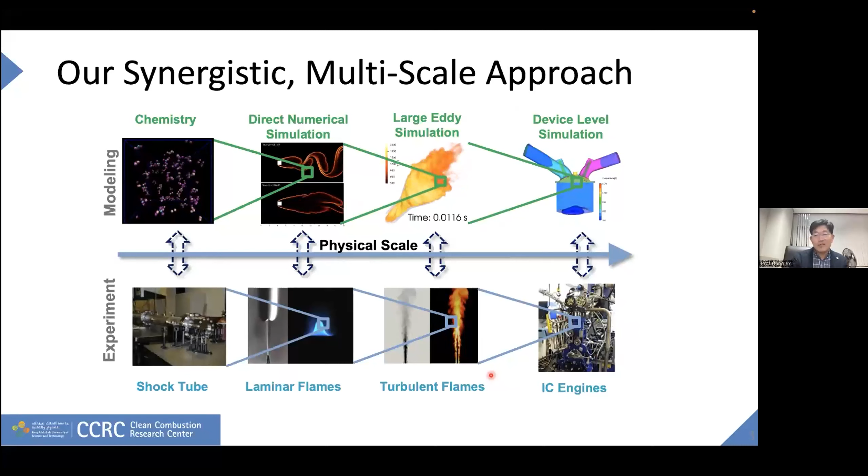So again, I'm unfortunately and fortunately the only CFD person in the center, and given the diverse research activities, I get to do all sorts of simulation activities, starting from DNS and LES and the engine work. So for DNS, I usually use my own research code, in-house code called KARFS. And for the engine simulation, we are heavily using Converge, the commercial code. And the device-level large eddy simulation is mainly conducted using the OpenFOAM research tool.

This is something I have started working on since I joined KAUST about 10 years ago. And this has become one of the integral parts of my research activities. So I'm going to talk about not necessarily all LES, there are some DNS components as well, but OpenFOAM-related simulation work will be presented today, okay?

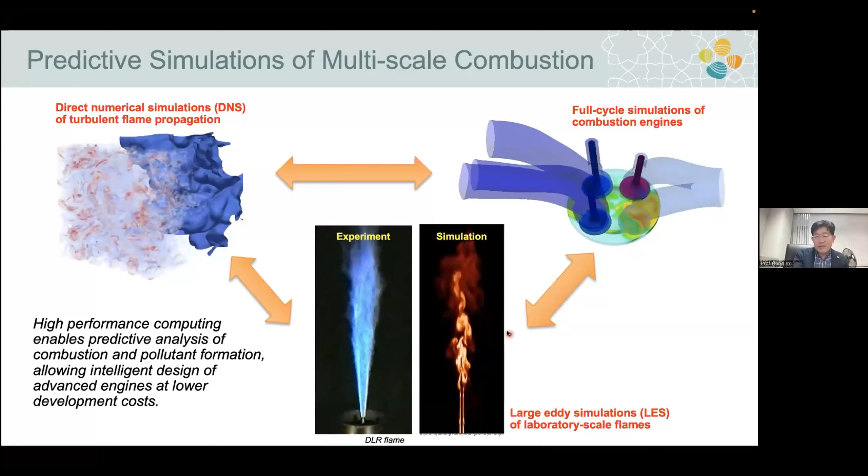So that's the idea. Well, just to set the tone, I'm sure this audience is easy to convince. I don't think I need to spend too much time on why we are working on combustion research, but just to set the current status, as an example, in the EU the legislation is shifting back, starting to recognize that battery and solar energy is not going to solve 100% of the problem. They are trying to acknowledge gas and nuclear to be included as green in their taxonomy.

Well, so my point is that I think the entire world is beginning to realize that such a rapid push for a green solution is probably not realistic. And we also clearly know the solution. So, especially speaking to the younger audience in this crowd today, who are kind of doubtful about their future, my personal opinion is that there is plenty of exciting work that is needed, especially to deliver the solution toward energy sustainability in the many decades to come.

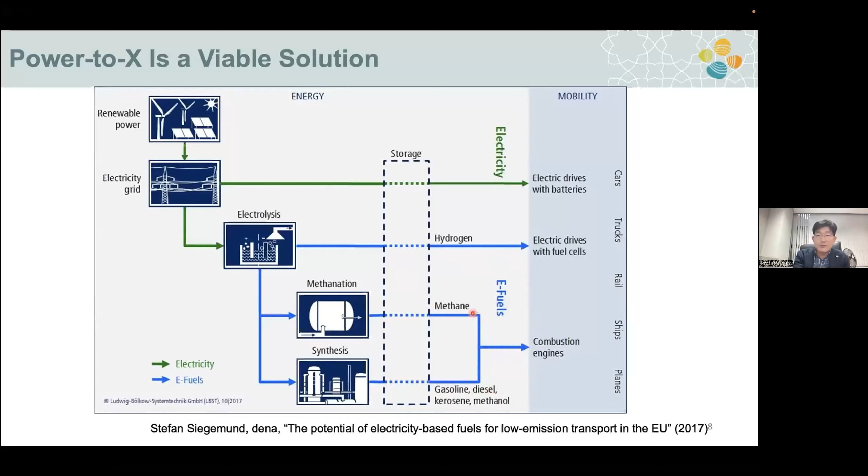So with that in mind, at the CCRC, the Combustion Center, our research focus is exactly that. We basically recognize there are some industrial sectors that are difficult to immediately decarbonize, such as heavy duty, marine, and power generation. And also there is a lot of industrial heat that cannot be easily generated without combustion. And storage, transportation, and utilization will become significant issues. These are going to be the wider variety of research activities we will be engaging in for the decades to come. In doing so, especially for me in computational applications, we will directly employ a lot of modern AI and machine learning techniques toward improved computational capabilities, as well as diagnostics and so on.

So these are some of the ongoing themes that we are trying to adapt. Compared to 10 years ago, we have changed our research direction. So some of the new research direction we are working on is, number one, definitely e-fuels. So especially hydrogen and ammonia are the two key fuels. I guess I don't have to emphasize this to this audience.

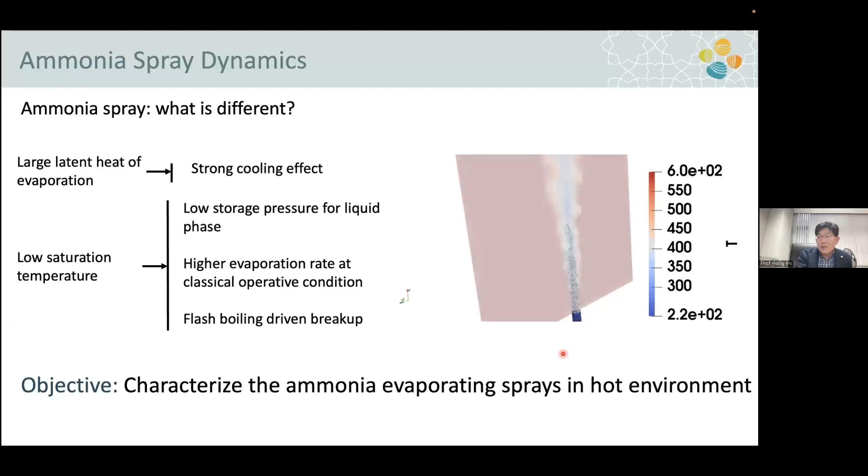So our main objective here is to run some basic direct simulation, Lagrangian Eulerian simulation, to understand the spray dispersion and evaporation pattern and how it is different for ammonia. That kind of simulation is done using OpenFOAM. As you know, sprayFoam is a very nice starting template we used, and this is the general configuration. I don't want to read all the gory details of it.

So basically, we have a periodic pipe attached here, so that has fully developed turbulence generated at the inlet, and along with it, we are injecting the liquid droplets, ammonia droplets, in a Lagrangian particle fashion. A large number of ammonia particles are injected at the droplet temperature of 220 K. And the main parametric study here is that we explore different ambient temperatures.

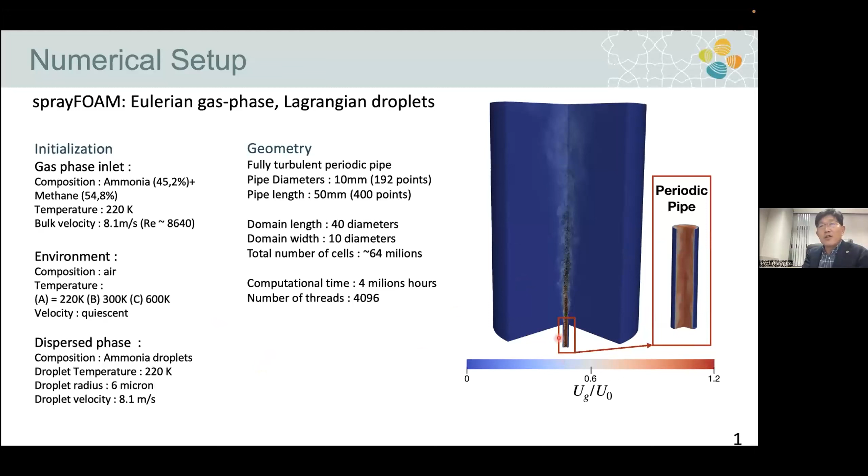One is the same temperature as the droplet, and the two other cases were heated to about room temperature and a sufficiently high temperature. And the gas velocity, the environmental velocity, is quiescent, although there is a turbulent inflow coming in to carry the ammonia spray.

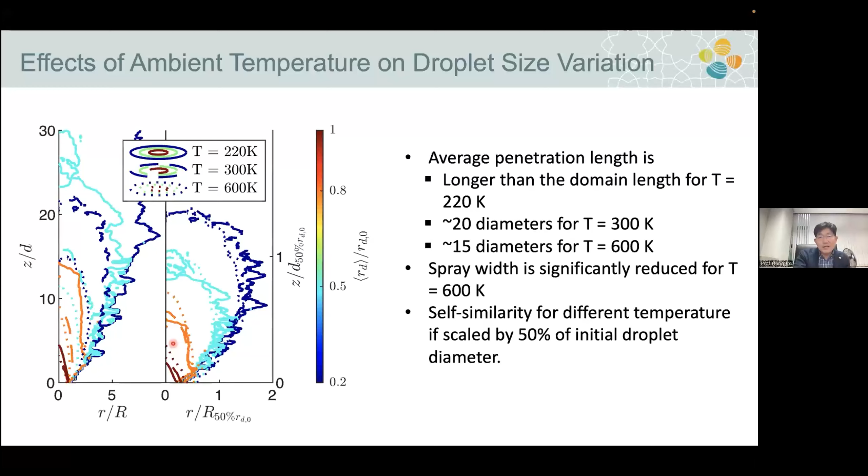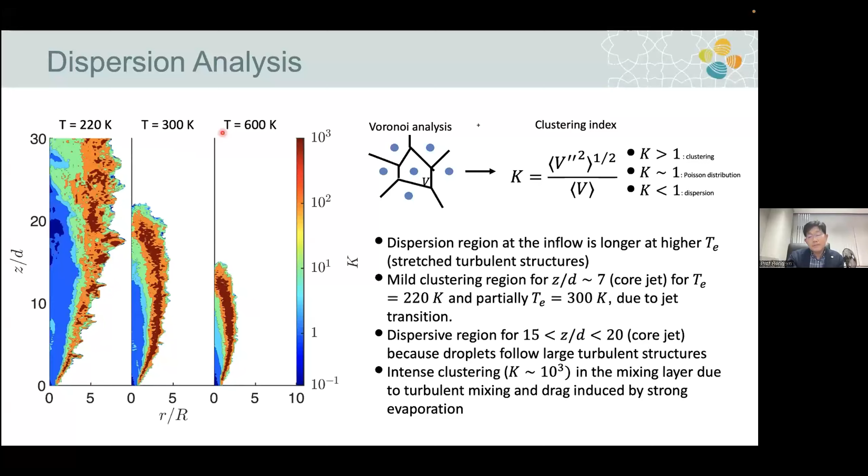Okay, so now moving on to the second topic, which is about turbulent combustion modeling. Now we are trying to deal with ammonia. This time it's gas phase turbulent combustion. My student Suleiman did most of the work here with the help of Francisco. We have an in-house experimental capability of studying ammonia turbulent jet flames. We're talking about non-premixed jet flames here.

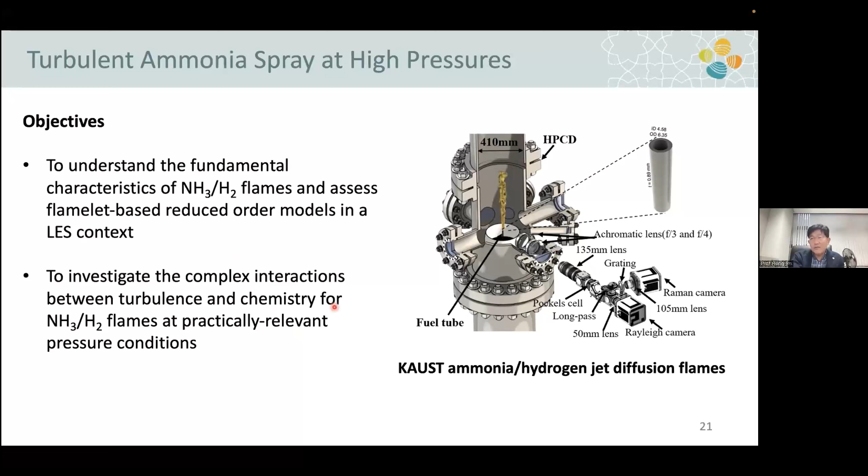Those are the basic study. We have just launched the study, and some of the preliminary results are coming out. These are excellent topics for the next TNF workshop. We are already working on it. Now, in order to predict that observed experimental configuration, we are also conducting large eddy simulation to match these results. In doing so, again, DNS is not feasible. We are trying to develop some combustion submodels.

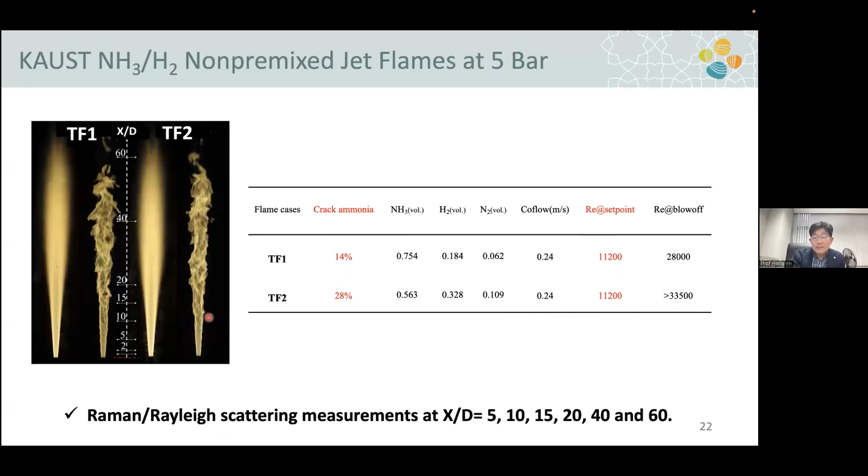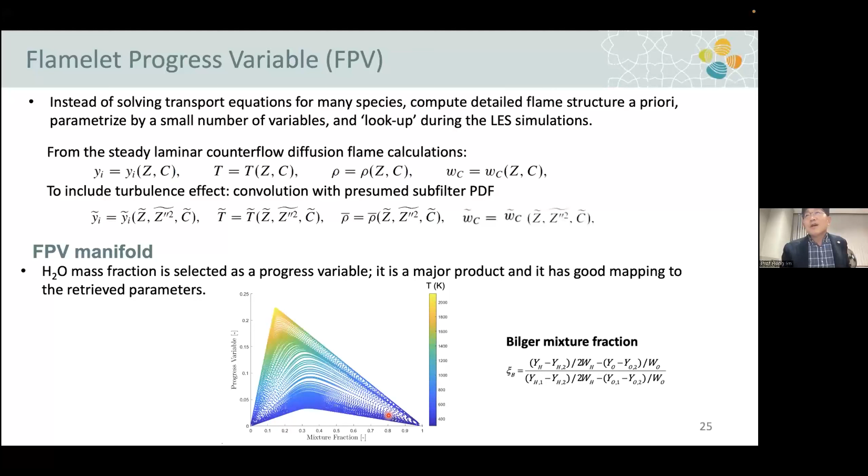To include the turbulence effect, we do the presumed subfilter PDF to integrate the cell-averaged species, temperature and density quantities. These are built in a similar way as many other people are doing. So this serves as a good benchmark submodel. But in terms of additional advanced model development, we took one extra step.

Recently, we started developing principal component analysis, PCA, which is an idea originated from Sutherland and Parente about a decade ago. The idea is that if you have large enough flame data, if you align them through the scatter plot, you can find a handful of important principal directions, which is not necessarily a single component, but some linear combination of those.

So instead of developing this PCA from complex turbulent flame simulations, which you can also do, we are borrowing machine learning ideas of generating a whole bunch of strained laminar counterflow flames at different strain conditions so that we can cover different phase space, the state vectors, and train them. By this training, we come up with the principal components, which may end up being a mixture fraction and progress variables in some cases. But these are agnostic, intuition-free generation of principal components.

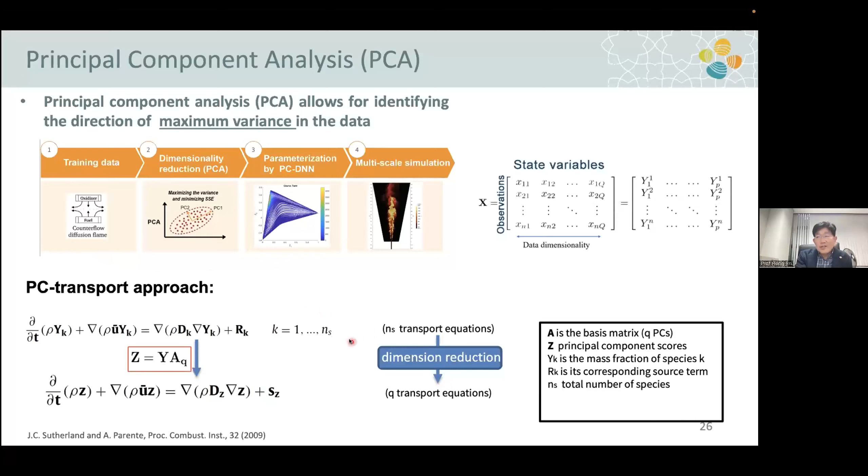But on top of that, as I said earlier, we are utilizing machine learning to speed things up. This so-called PCDNN, a deep neural network algorithm, is being used to tabulate all these PCA analyses instead of computing on the fly. And as our first step, regarding Lewis number effects, the unity Lewis number model was employed because generally accounting for non-unity Lewis number effects is complicated. There is not a unique single way to do it, and this is a subject of our future investigation.

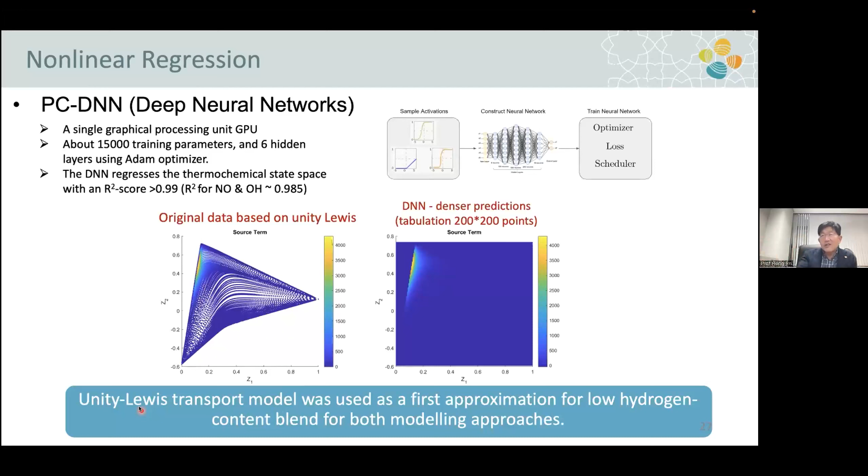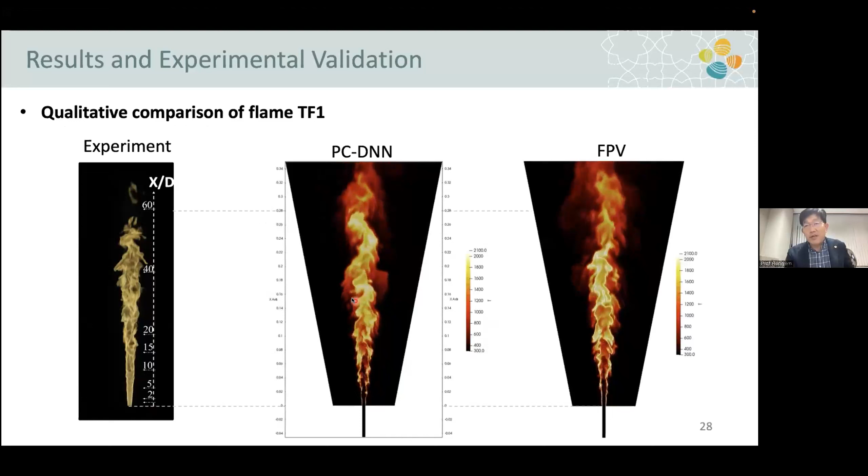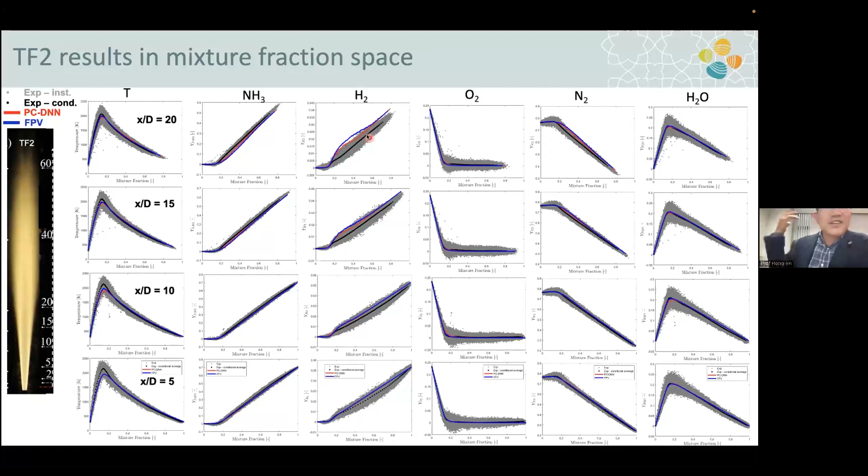I don't know if you hear the noise. Actually, it is raining as we speak, so the rain falling on the building is creating the background noise here.

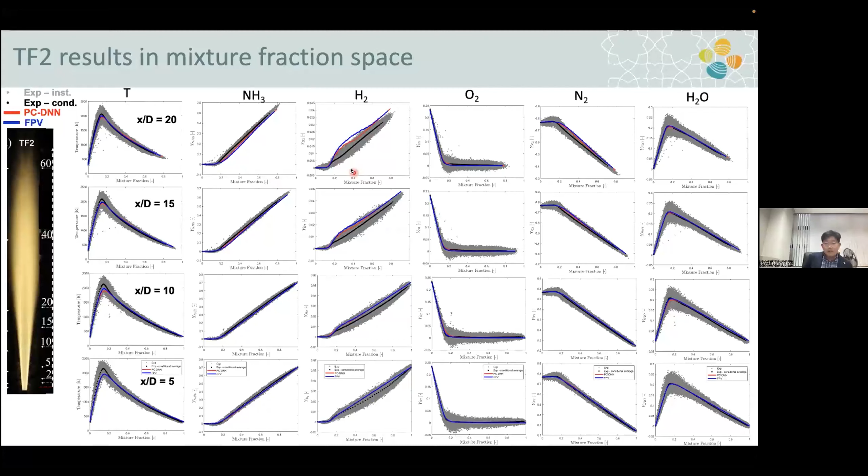All right. So we also predict TF1 and both different flames. For TF2, as you have a higher cracking ratio, as expected the hydrogen prediction error increases because you have a large amount of hydrogen. We also try to predict NOx, the NO mass fraction, for example. Again, they yield comparable accuracy between the two models. So at this point, this was concluded to be acceptable, with more work to be done.

Local extinction behavior in terms of data scatter is also reasonably predicted. I can't say for sure which model works better here, but both are able to produce some of these local extinction events, not as perfectly as the experimental data plot, but they're pretty good.

So those are the kind of work in progress. We are trying to develop the full-blown PCDNN based, which is actually a very powerful tool when the chemical behavior becomes highly complex.

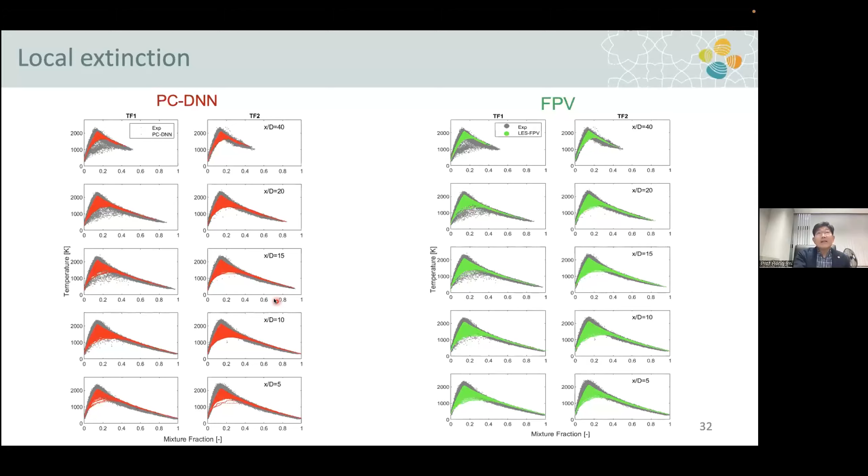Okay, I think I left about 13 to 15 minutes of the time. So I'm gonna switch gears, and the next topic of my OpenFOAM application is about spray simulation. This is non-reacting, but yet highly complicated physically and computationally intensive simulation. My student Alberto Ceschin has worked on the spray part, and Paolo Guida, who recently graduated, worked on the droplet explosion problem.

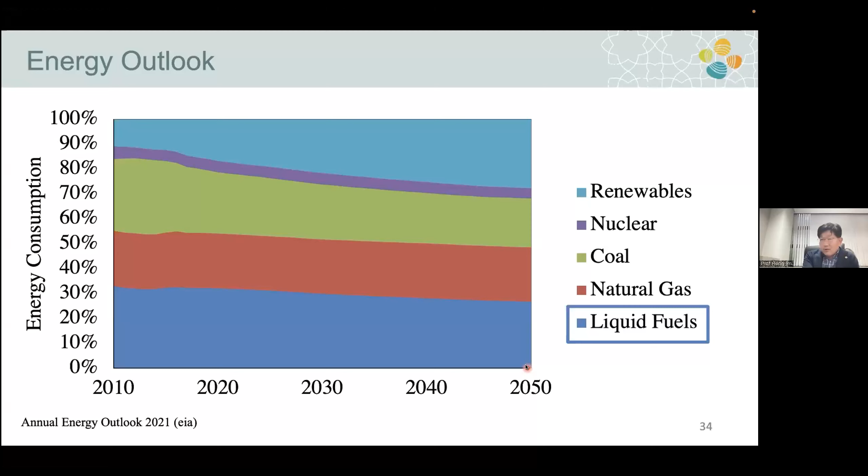Well, so another kind of background on the intro material. I guess the world is recognizing that liquid fuel will remain important even far into the future. So we still need to work on some kind of liquid fuel. It can be either hydrocarbon, fossil fuel based, or e-fuel based. But in the engine community, more recently, people are looking into the oxymethylene ether called OME, with different numbers 3 to 5. Those are considered very promising engine fuels in favor of the good NOx and soot characteristics. They can be fairly easily produced from other biofuels and so on. So these are considered another promising diesel substitute for the time being.

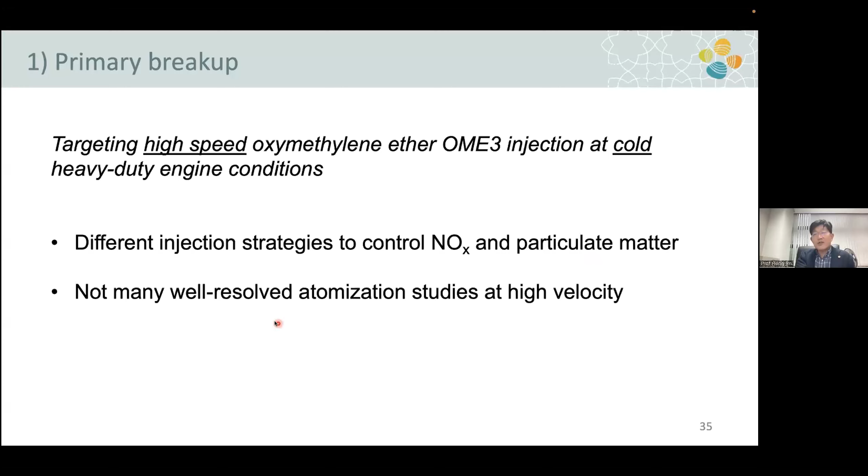So there is a growing interest in the engine community, such as the Engine Combustion Network. People are doing some experiments for spray characterization of this OME3. So we conducted some high fidelity simulation. What is challenging is the initial primary breakup behavior, in order to characterize the different injection strategies and how the injection strategies affect the subsequent soot and NOx prediction. The initial primary breakup phenomena is extremely multi-scale, a large spectrum of scales, and it is very, very difficult to reproduce.

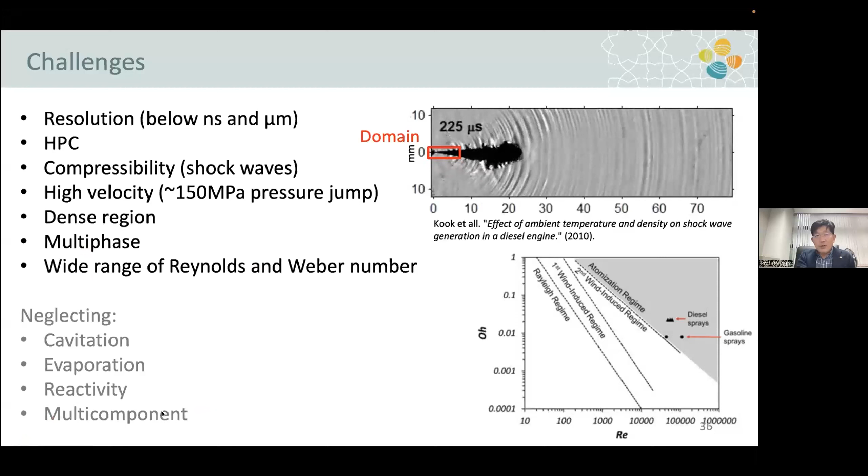And experimentally, it is highly challenging because of the sheer dynamic range of the physical scale associated with the presence of the shock wave, compressibility effect, extremely high velocity of the jet, the dense regions and multiphase; it's such a nightmare. So it is experimentally very difficult to measure, although there is some limited amount of data available. And so we are trying to do the first principle simulation of that. In the initial simulation, we neglect the cavitation behavior, evaporation, reactivity and multi-component. All those aspects are simplified. Still, it's a very complex problem.

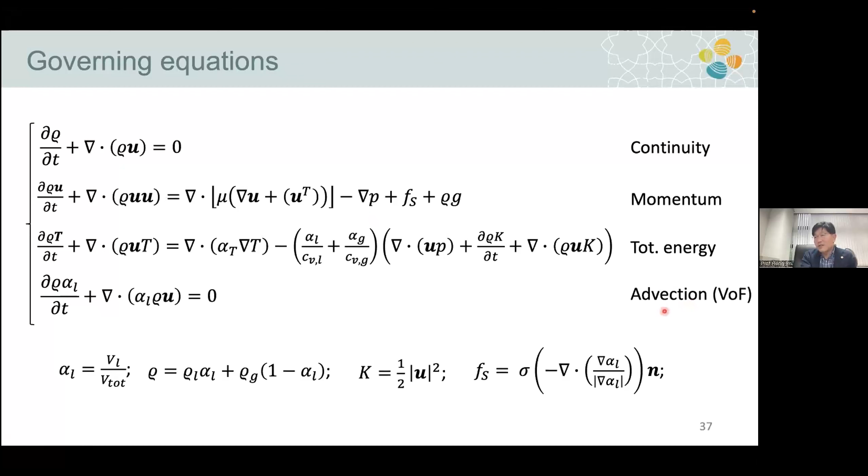So it is a single-fluid model with the two phases represented by the volume fraction of the liquid, alpha L, and alpha G is 1 minus that. We are solving all the continuity, momentum, and energy equations. And then advection of the volume fraction is done through the VOF approach. This VOF is already a built-in module for OpenFOAM. One of our key breakthroughs in our endeavor into this interface phenomena was the piecewise linear interface calculation based reconstructed distance function. PLIC RDF is the acronym.

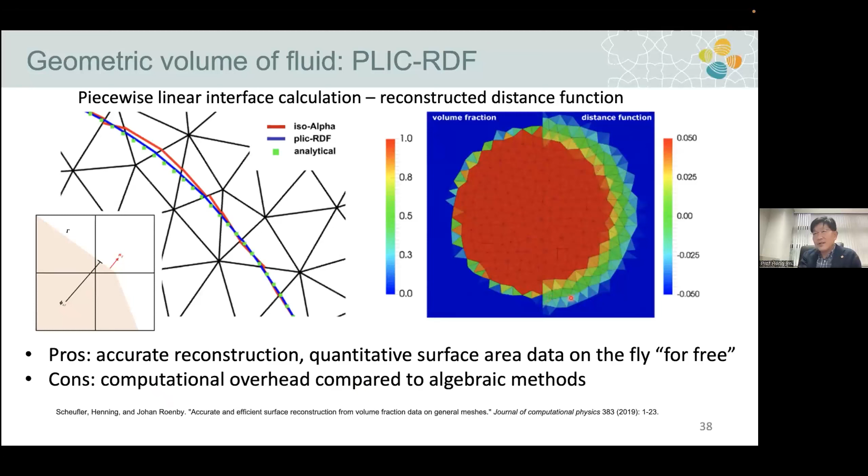And the VOF simulation has been conducted, combined with AMR; this animation clearly gives us an idea of how that works. Again, we didn't invent it. It was also implemented in some of the OpenFOAM toolkits. So once again, demonstrating the advantage of utilizing OpenFOAM. There are many tools already out there. We just need to borrow and add some more functionalities.

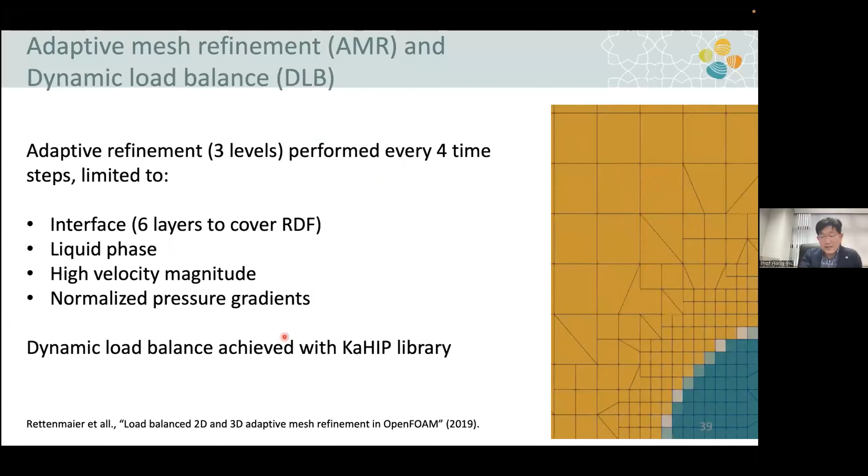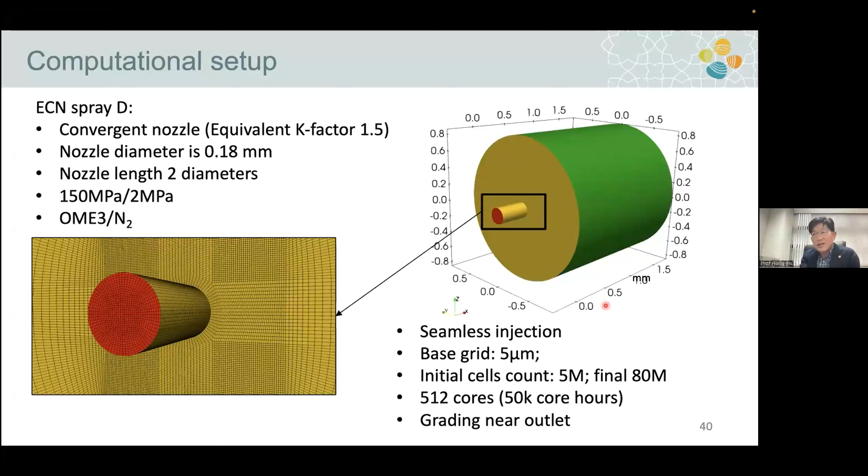So this is the nozzle geometry, a slightly convergent nozzle. The standard ECN Spray D with OME3 and nitrogen surroundings is the main study here. We have a very fine grid, with grid size about 1 to 2 microns, to capture some of the smallest droplets that can be produced out of this jet. The breakup has been captured.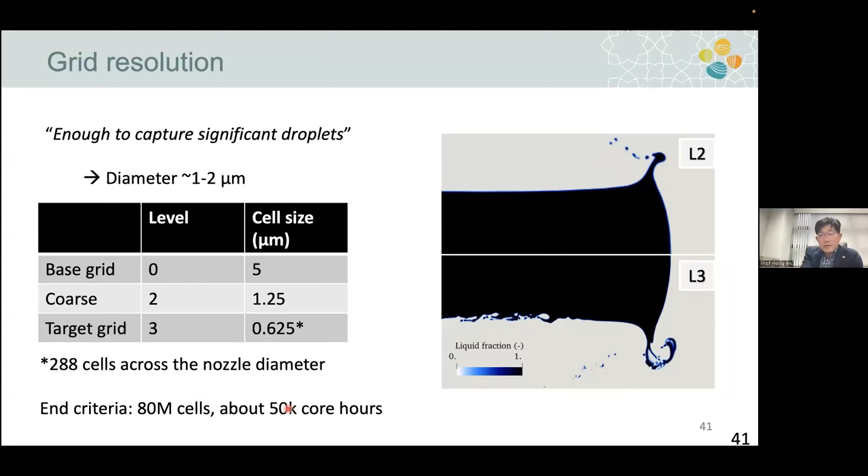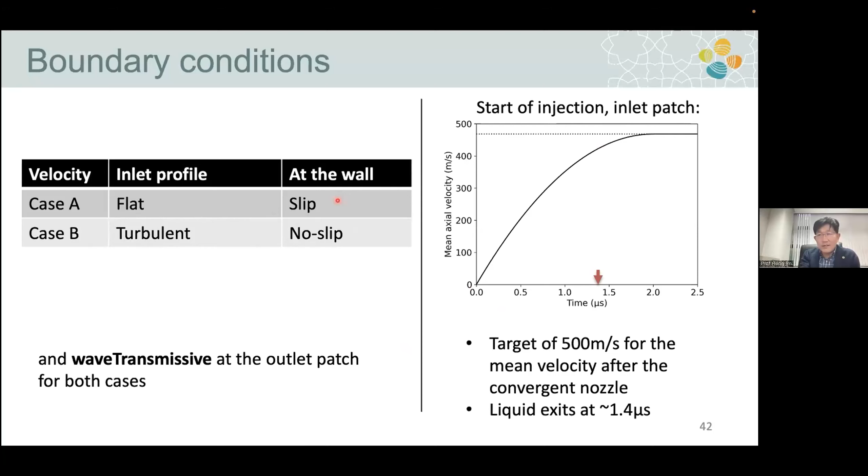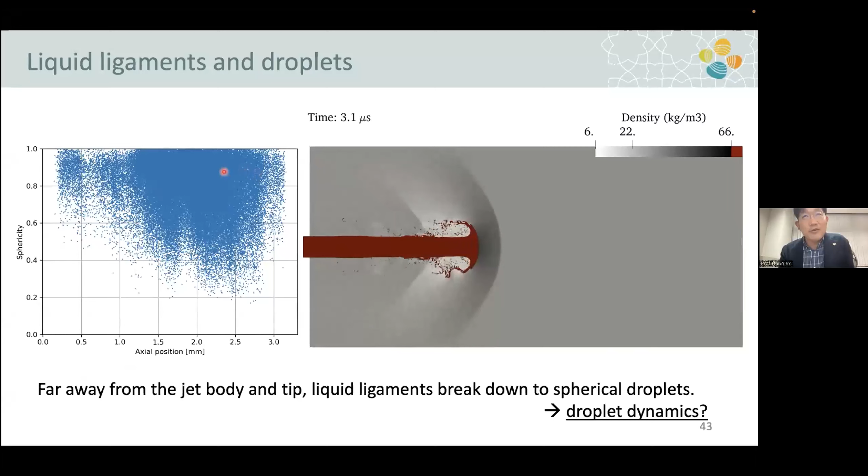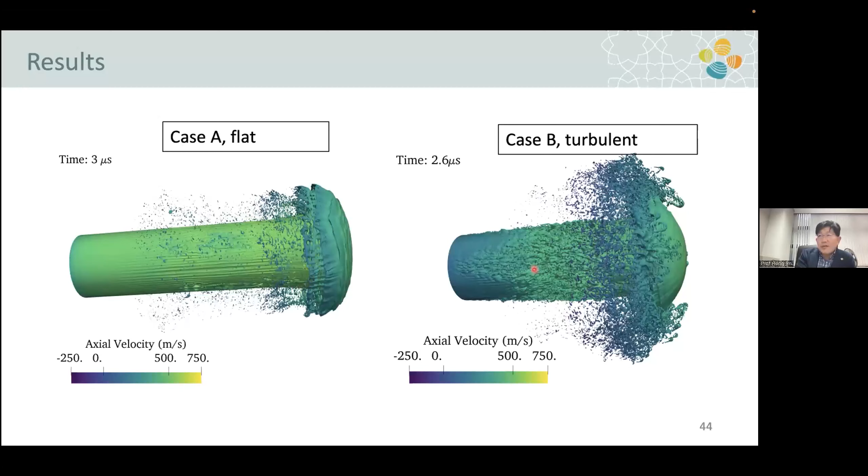So these are the snapshot image comparisons between the flat inlet versus turbulent inlet. Obviously, the turbulent inlet tends to break up faster, showing a lot of these Kelvin-Helmholtz type breakup on the side of the liquid column, which is more pronounced. And we were able to capture some of the physical behavior that was observed by experiment.

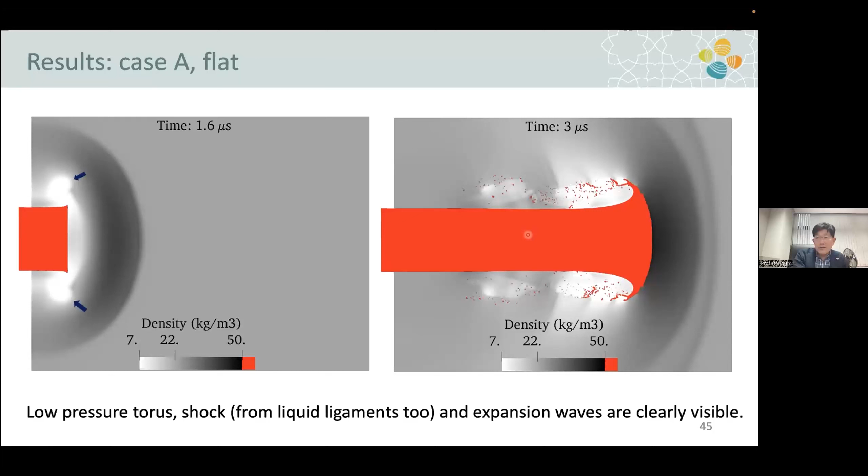These are the shock waves associated with the liquid column hitting onto the nitrogen environment. We are forming the shock wave, and that actually contributes further to this breakup behavior. And those are clearly reproduced successfully by this high fidelity simulation. And again, I'm kind of repeating myself. Some of these are breakup patterns. These are some sketches of how they break up into small child droplets. And these are really captured by our simulation right here.

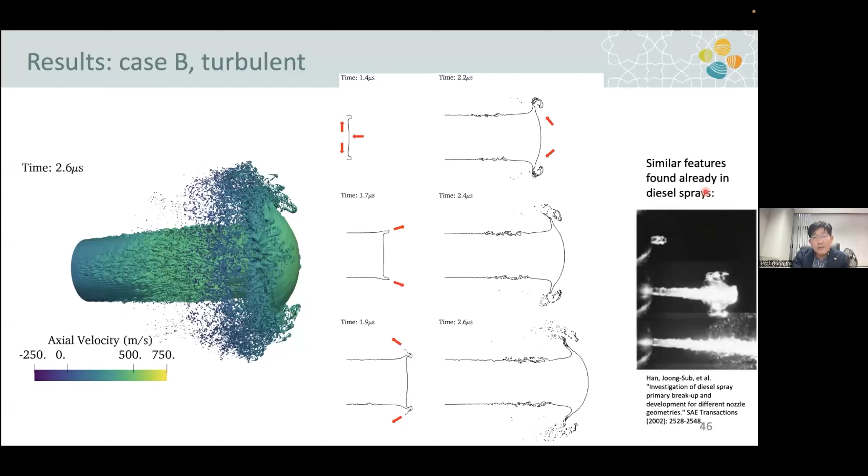And this actually confirms some of the similar features already found in the diesel spray experiment. So I think this was one of the rare high fidelity simulations, to our knowledge. This is one of the first success stories of DNS reproducing the jet breakup behavior, liquid breakup, in a fairly faithful way.

Okay, so the last topic, which was also kind of a cool demonstration, and I think this is again one of the first demonstrations of single droplet breakup, in particular associated with a bubble inside. These are obviously of practical interest, especially when you're dealing with heavy fuel. And in fact, at KAUST, we have ongoing activities in heavy fuel oil gasification. And this was one of the practical contexts.

So people also did experimental investigations of suspended droplets, how they break up when they heat them up, especially when there's a tiny bubble inside. These are highly complex phenomena, and experimentally it is really limited. A suspended droplet only allows a large droplet, so you can't really measure small droplet behavior. The frame rate and resolutions are limited. And if you want to measure the temperature, the thermocouple becomes intrusive, and so on. So there are many, many experimental limitations.

Nevertheless, some experimental measurements have been attempted. And to our knowledge, there is no direct quantitative comparison of the behavior by simulation. So we conducted that. Unlike the spray simulation I showed earlier, this time we actually did multi-component. So there's boiling, and there are two fields for energy and species. Individual multi-component species equations are actually solved. So those are the differences in this VOF application. So it is more computationally intensive, without reaction though at the moment.

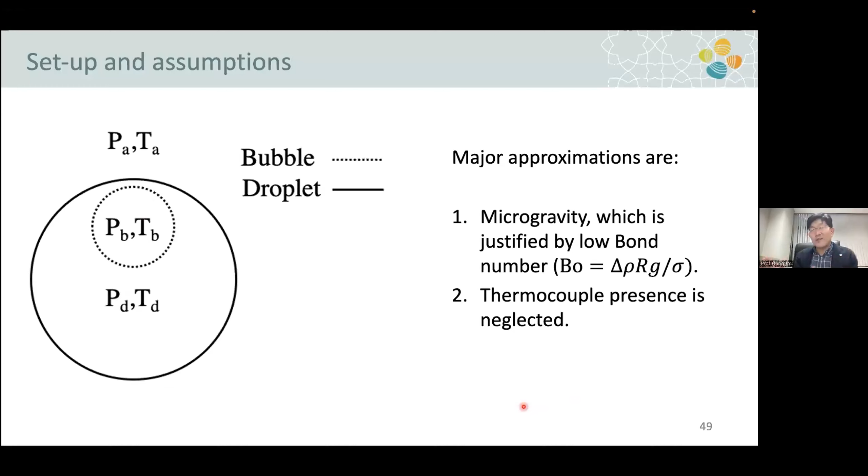So the setup is the following. We have a single spherical droplet within which we have a spherical bubble inserted off center. And the major approximation is microgravity. I think it's justifiable considering the size of the droplet is tiny. And the thermocouple is neglected. So obviously there is an expected gap between the experimental data and simulation.

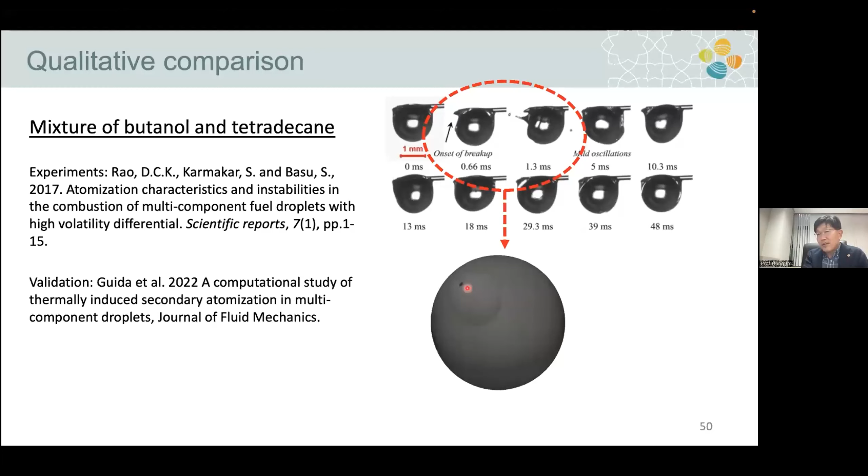So this was quite a triumph of our computational tool. Again, as I said, this RDF algorithm was critical in capturing this intricate surface phenomenon. And we further conducted quantitative, well, I should say qualitative at the moment, comparison. Quantitatively, there's still an error, but this was really the first demonstration that we were able to capture that the size of the ejected satellite droplet increases as a function of alpha r, which is the diameter ratio. And we were able to reproduce that faithfully. And likewise, the time at which surface area is maximum, again, we matched the experiment fairly closely by the numerics. So at least the qualitative trend is well captured.

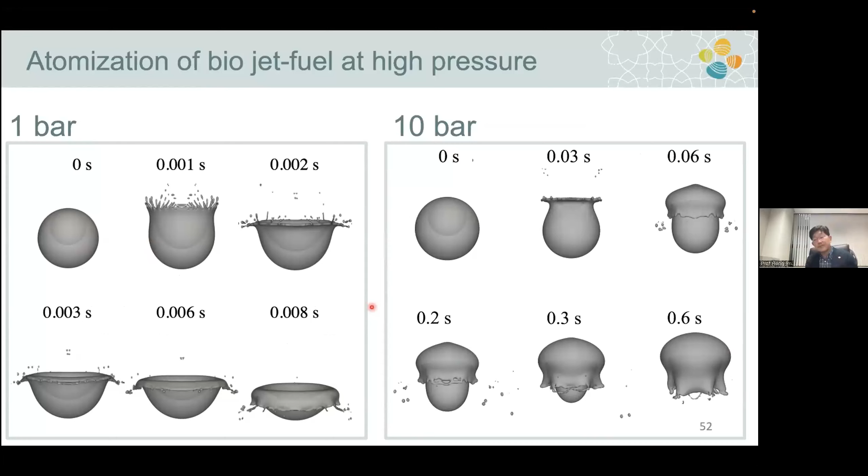This is another example, a more recent study of the biojet fuel breakup behavior. You can appreciate how the breakup pattern changes qualitatively, even with the same initial condition; depending on the surrounding pressure condition, the breakup changes significantly. And then again, we are comparing some of this observable behavior.

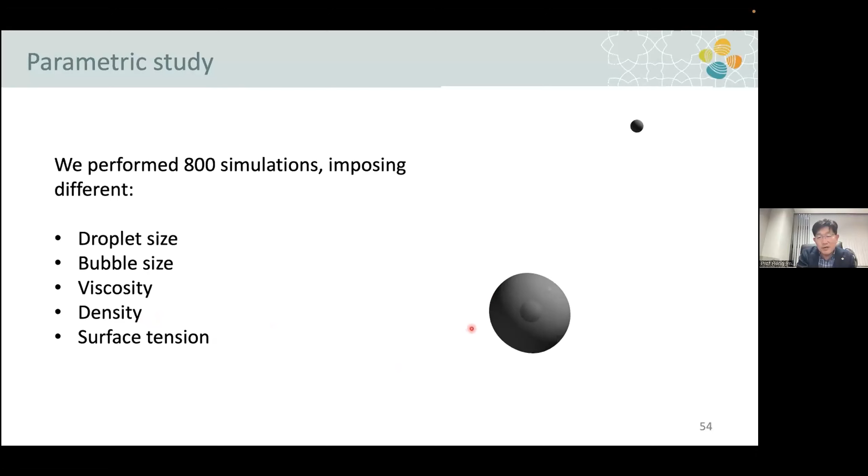So why does it matter? Why do we do this? As I said, we are developing this computational simulation module for HFO, the gasification tower. In doing so, there is an injection of liquid droplets, and they will break up, and they need to be gasified. This is such a complex phenomenon. We want to run hundreds of these simulations, depending on the droplet size and bubble size and viscosity, density, and so on. And we will build up and also introduce multiple bubbles.

This was really a cool reproduction of the physics, and you can see that these tiny bubbles actually move around the surface and get absorbed into the big droplet. So they don't really contribute much to the eventual child droplet formation.

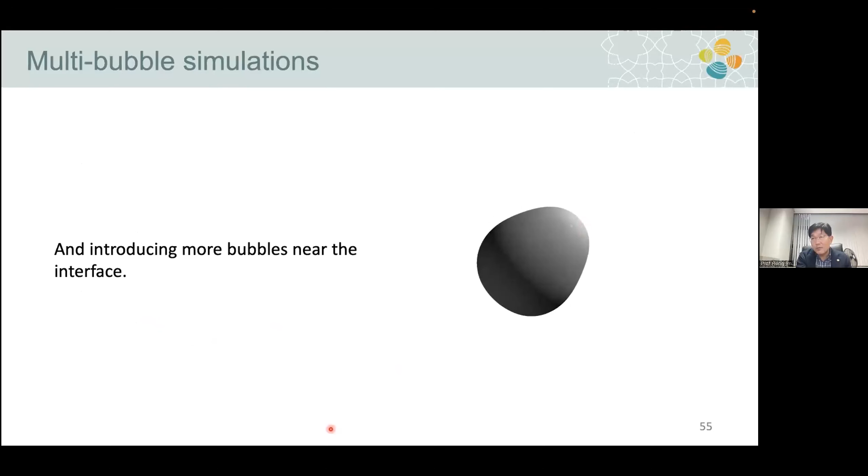So anyhow, much of this simulation data is used to compile our characteristic time and some of those global quantities that are useful in engineering-type simulations. So we are in fact utilizing this correlation data to simplify the whole droplet tower simulation. And this is actually current work in progress.

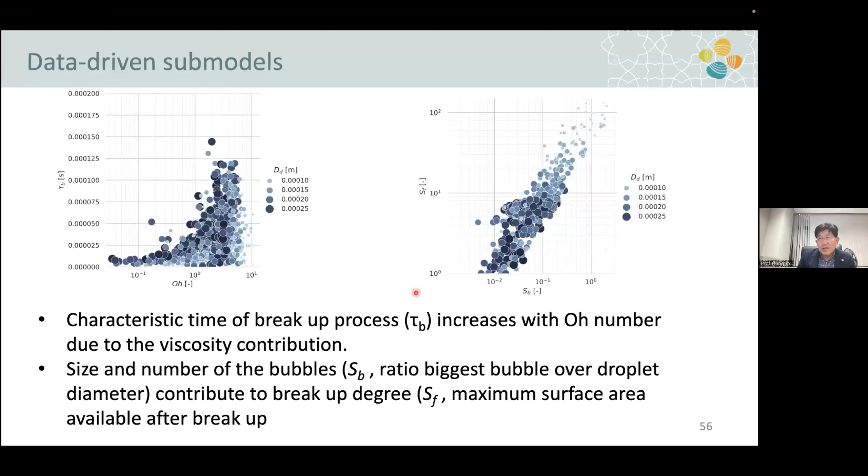So I think that's good timing. I don't leave too much time for questions, but anyway, that's a kind of show-off of small snapshots of our ongoing projects utilizing OpenFOAM. There are a few others, but my time is limited.

So I would like to summarize by concluding that OpenFOAM is a really good, versatile CFD code that gives us many functions without each research group having to invest in development, such as flow solver, unstructured mesh, adaptive AMR, Lagrangian model, reaction, combustion submodels, all inclusive. Each user needs to tweak some of the weak areas, and then we can immediately get the results.

So we are hoping that many of the audience here today have a common framework, a common platform of OpenFOAM. I think this is another benefit of working in the OpenFOAM community, to enable easy collaborative programs between different groups.

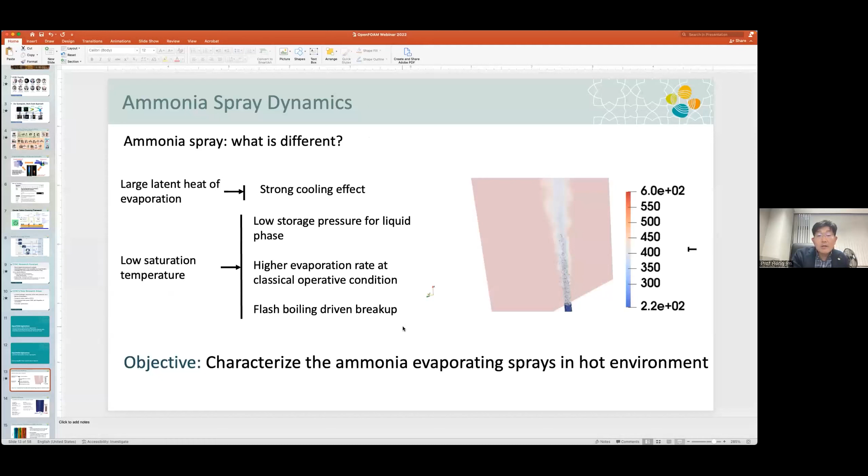Yeah. Well, so there was, about this first phase ammonia droplets. I don't have the exact number, I'm sorry, but I guess there are like several hundreds, maybe if not thousands. Those are seeded into, it's monodisperse for now. The droplet radius is 6 microns at the same velocity as the flow, and then we are just injecting at the nozzle.

Well, okay. This is still initially a fairly dispersed spray. So we are not really complicating the problem by allowing them to collide and merge. It is a single Lagrangian particle, and each of them are evaporating, but we want to know how they disperse, and this dispersion pattern is a key subject in this study. Okay.

In fact, that is related to one of my own questions, so I may just ask now. So I can see the diameter of the droplet is 12 micron. How does it compare to the mesh size near the inlet? Because it could be a problem when they become comparable. You mean the jet breakup part here? No, so you mean the ammonia spray?

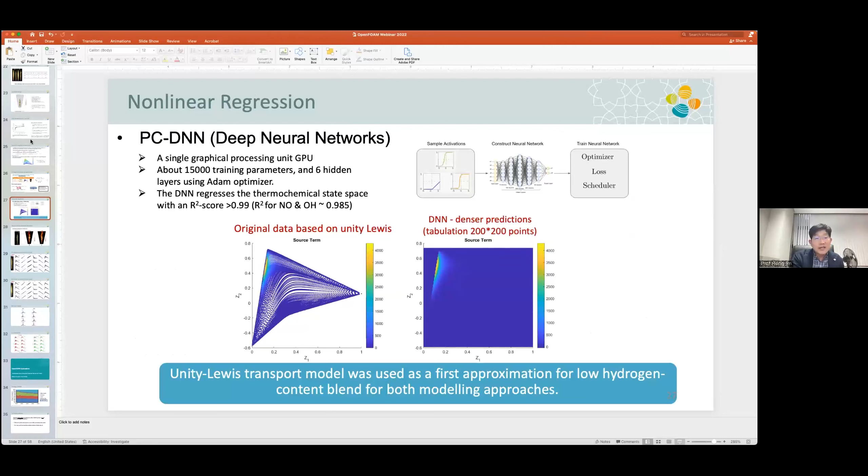Okay, thank you. So his last question is, for the LES case, what is the advantage of your machine learning method compared to the others? Well, machine learning is everywhere, as you know, and we are also using them. Machine learning can be added to any submodel. In fact, we are also working on a standard flamelet progress variable. Even tabulation can be done by machine learning. You can tabulate it and look it up, and those tabulation algorithms can also be enhanced, accelerated by machine learning.

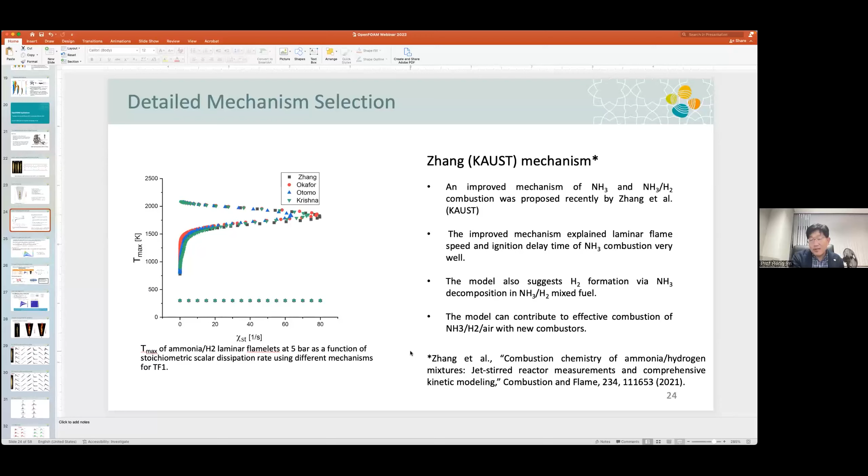So my simple answer is that machine learning is a separate tool, and tabulation relies on big data, a large number of data, curve fits, and so on, and those are the usual targets that can be easily accelerated by the use of ANN algorithms. Just to elaborate more, my new approach of this LES is based on PCA analysis. I guess the advantage there was clear. We are trying to reduce the number of transport equations being dealt with in the LES simulation.

Okay, thank you. We have some questions from Huang Wei. Do you want to ask yourself, or should I read them for you? Okay, I can ask myself. Sure. Yeah, thank you very much for your nice talk.

Professor Im, for the first application, what is the carrier gas for the ammonia droplets in the jet? What is what? What is the carrier gas, the composition? Well, sorry, I think it's just nitrogen. Oh, it is pure nitrogen, right? Well, there is no reaction whatsoever, and just the droplet evaporates. No, sorry, the composition is air. But it really doesn't matter. There is no reaction, and the density is all accounted for in a general way.

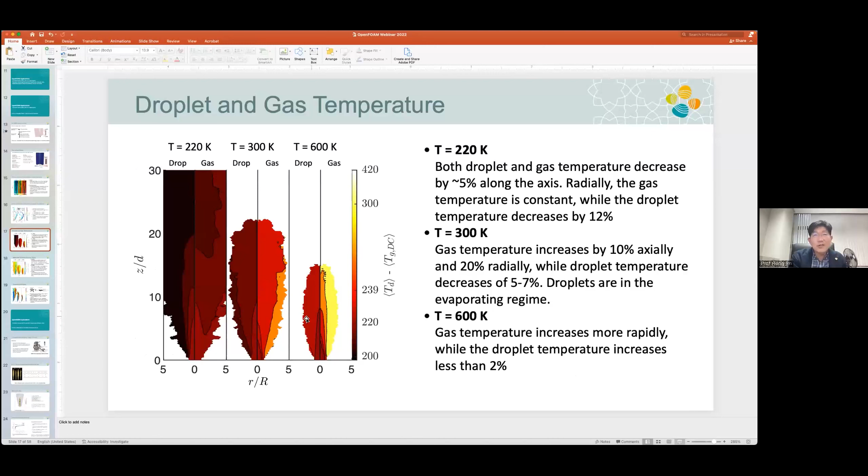This is mainly about a single Lagrangian droplet evaporating, losing its mass until it evaporates. And through that evaporation, there's a mass, momentum, energy exchange with the surrounding gases. So I apologize, maybe I made a mistake, but all those transport and thermodynamic properties are kept as they are. We're just dealing with the mass and heat exchange as shown right here, and this one, right? Okay.

So actually, there's a second question following the first one. How do the ammonia droplets affect the gaseous flame? Originally we have the methane flame, because the methane is from the jet, so it is a methane jet flame, right? Then we also inject the ammonia spray from the jet. You're talking about dual fuel, like ammonia added into the methane flame.

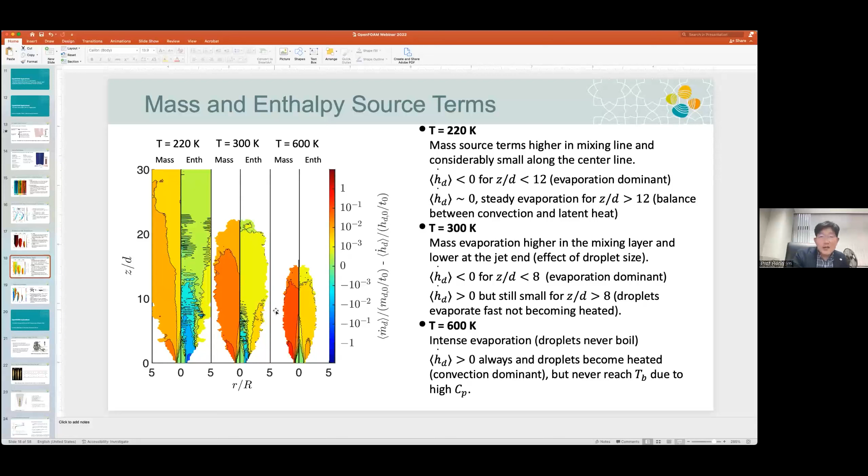Yeah. So that is a kind of scenario you may think about, having a methane flame surrounding the ammonia spray, for example. And ammonia will provide evaporative cooling to cool off the core region, and it will also be dispersed in such a manner. So this is exactly the context of our study. At the moment, we only represent the effects of the heated surroundings by just heated air, without considering the combustion. That's the future work to be done. Okay, no problem. Thank you.

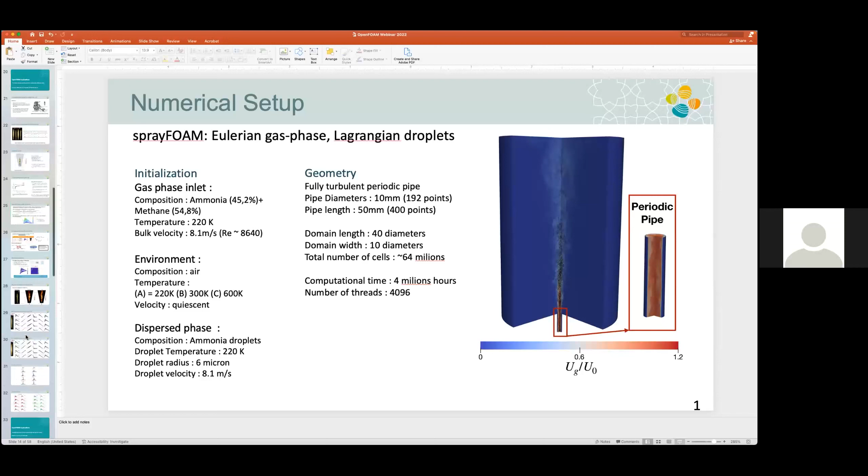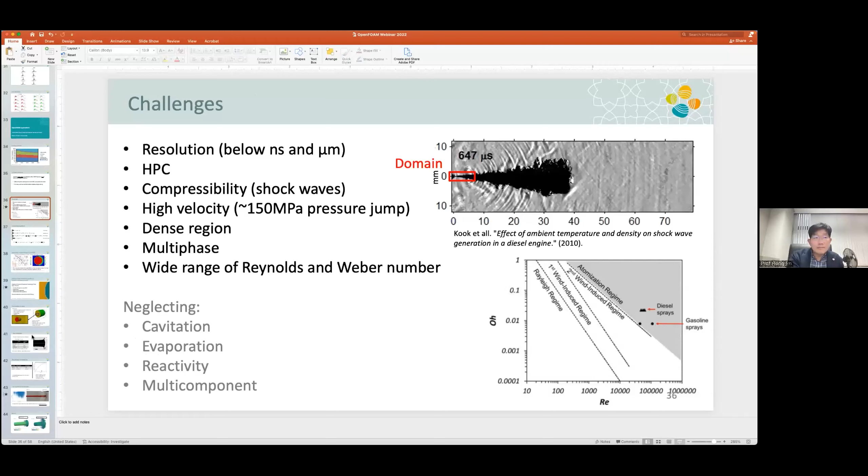My second question is for the VOF case. When the droplets from the liquid breakup become smaller and smaller, finally they will become subgrid, right? In your case, did you consider the transition from interface capturing to Lagrangian droplet tracking? We don't switch over to Lagrangian in this whole simulation, which is the ELSA that engine people do, although their Eulerian version is much more crude. This is a really extreme Eulerian simulation. We just resolve as much as we can, and any droplets smaller than the resolution, we ignore them.

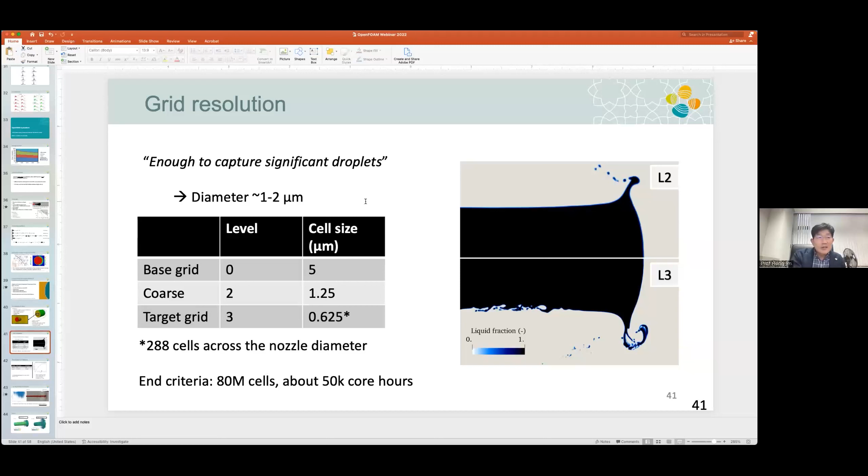Okay, because here it is non-reactive, right? I guess when we consider the combustion case, then yes. So we are trying to get the extreme high fidelity and push to the limit to see whether you can really reproduce this physics of the breakup. That was the scope of this work. Okay, thank you very much. You can't use it for actual engine simulation at the moment. Okay, thank you.

Any other question? Yes, there's one more from Dr. Bolson Wang. I can read it for the audience. His question was about the flash boiling breakup regime.

This is one important area of interest. We were originally hoping to find anything similar, but we were not able to find that scenario yet. To tell you the truth, I don't have a quick answer for that question. This is another topic that we want to identify, and we are not even sure how important flash boiling is going to be with ammonia droplets in practical combustor conditions. We are working on ammonia jet flames at the moment.

The second question: does KAUST have a benchmark jet flame of ammonia methane with detailed measurement? The answer is yes. Although we are not directly injecting ammonia spray, it is all the ammonia flames you have seen. We have different types of fuel mixtures, including a blend of ammonia methane. Those databases will be made available to the community through the TNF workshop and so on. More will come out soon, so stay tuned, and feel free to contact me if you are looking for experimental data.

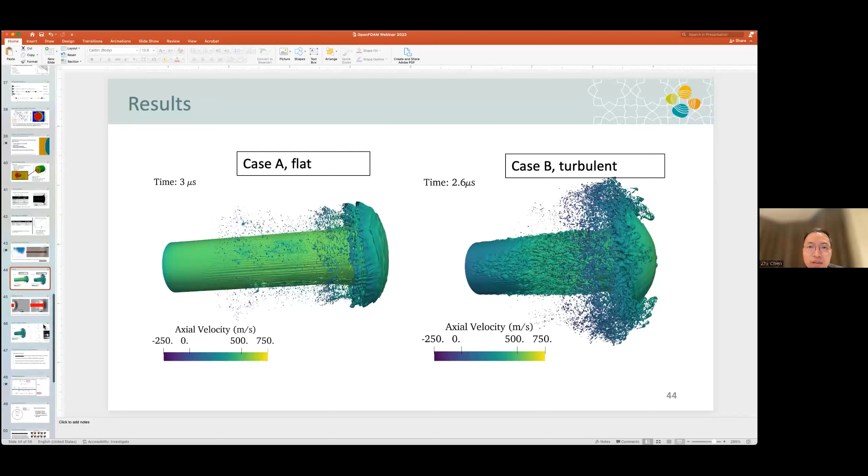I actually have a small question. Are the TF1 and TF2 ammonia flames going to be available for the next TNF workshop? I think so. You probably didn't attend TNF this time. No, I didn't. There was a special ammonia session within TNF, and we talked about it. This will definitely be a growing topic within the community. Feel free to join the monthly meetings; there will be more discussion about how we're going to share the KAUST ammonia jet flame data. It is coming. That sounds wonderful. I think a lot of groups will want to simulate it like what we did for the Sandia flames.